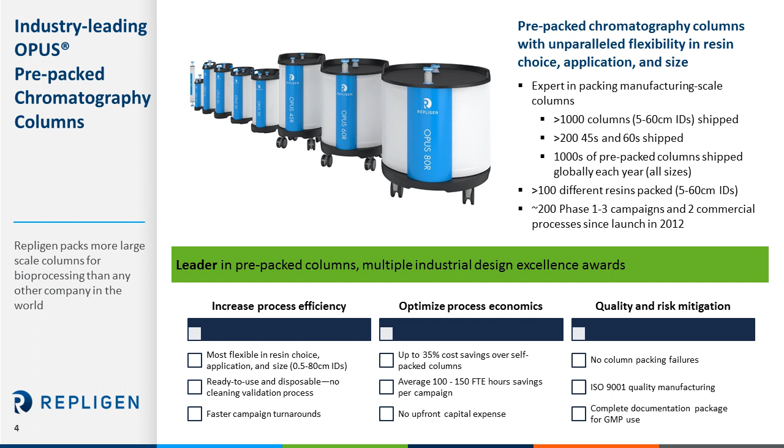Optimizing process economics, we are doing the packing steps for you. That means you save many hours of time in packing, in preparation for that packing, and all the documentation that goes along with that. Finally, from a quality and risk mitigation standpoint, we've built our quality system to support column use in the GMP environment. Today, our range of columns goes from 50 microliters now to 150 liters in column volume with the introduction of the Opus 80.

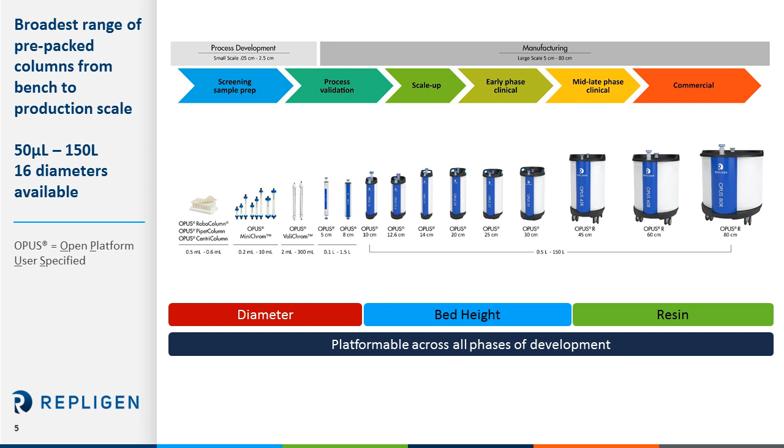As you can see on the slide, there are many different diameters in between. Our end users choose the diameter, a bed height which we can configure to the nearest millimeter, and then we pack any supplier's resin. This makes our columns very platformable across all phases of development.

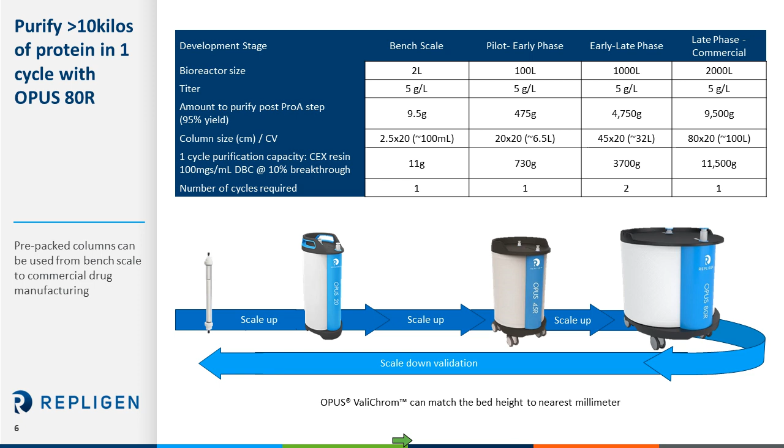You can see that with an 80 centimeter column, the purification horsepower is around 11,500 grams, which means you can purify, in this model, a harvest from a 2,000 liter bioreactor in one cycle. Or if you have multiple 2,000 liter reactors and are willing to run more than one cycle, the purification can also fit nicely with the 80 centimeter scale. This gives us additional flexibility and capability for processing large volumes of product through the 80 centimeter column.

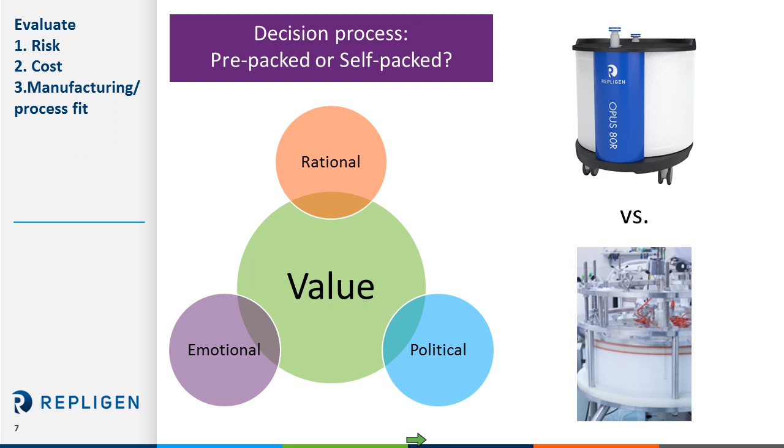This usually leads us to a discussion with our customers about pre-pack versus self-pack columns. The evaluation criteria are often risk, cost, manufacturing process, and fit. I don't have time to go into depth on all those factors in this presentation, but the summary is shown on the next slide. These are some of the things we've seen in the industry, and reasons why end users will end up buying pre-pack columns and move away from self-column packing.

There's economic savings that we can quantify, and we have a proprietary model that we use to help quantify the specific savings on a case-by-case basis.

Driving operational excellence and lean manufacturing principles, essentially making your process simpler by outsourcing the column packing step.

Eliminating packing-related risks. There's a lot of nuances that come with column packing, and if it's not an operation that you or your team does frequently, that can be a potential risk from a product timeline perspective, equipment, etc. So we take that risk away by doing the packing and the difficult work that comes along with it as part of our standard offering.

Flexible manufacturing strategies. These include things like multi-product or single-use facilities where changeover is often a time-consuming step, and pre-packed columns can help reduce that time. In addition, they offer a much smaller footprint versus conventional self-pack equipment.

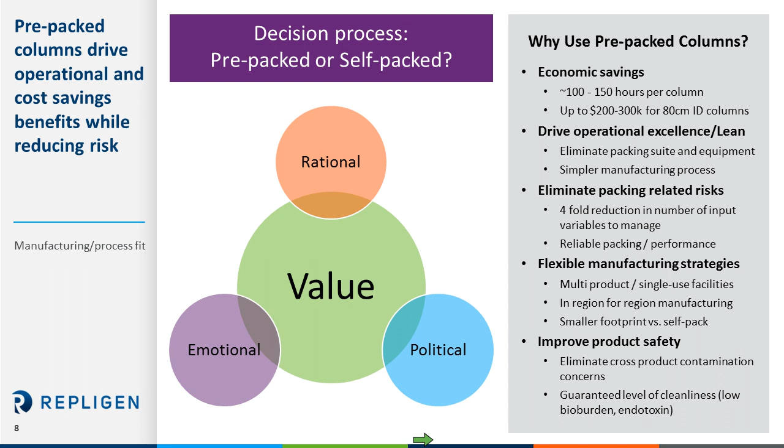So now that we've done an overview of self-packed versus pre-packed and understand a bit of the basics of the pre-packed column, we'll go on to show some Opus 80 centimeter applications data.

The column is 80 centimeter internal diameter. It can accommodate bed heights from 10 to 30 centimeters, and we pack resin from any supplier.

With the development of this column, we spent significant time optimizing the flow distribution system through computational fluid dynamics and experimental design. So I'll show a few slides on that.

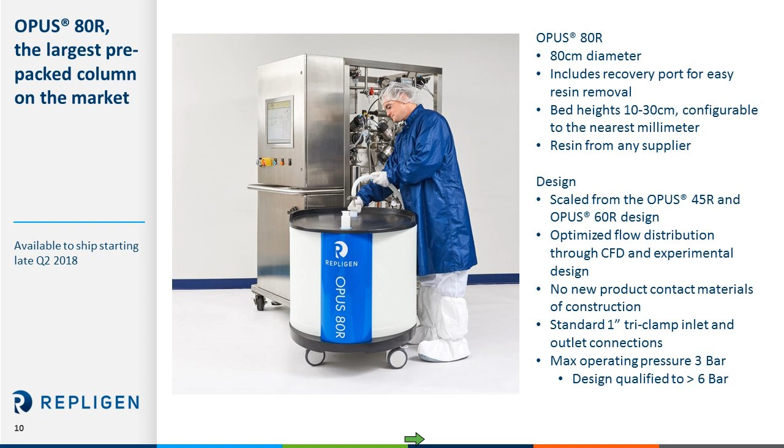In addition, there are no new product contact materials of construction compared to the 45 centimeter or 60 centimeter Opus designs. We use standard connections, and the maximum operating pressure is 3 bar. The design, of course, we've qualified to well above 6 bar, and this makes our columns fit into the normal bioprocessing workflows and conditions that you would typically run the columns.

The plastics are low leaching and Class 6 compliant, and that information is available, or more detailed information is available, in our regulatory support file.

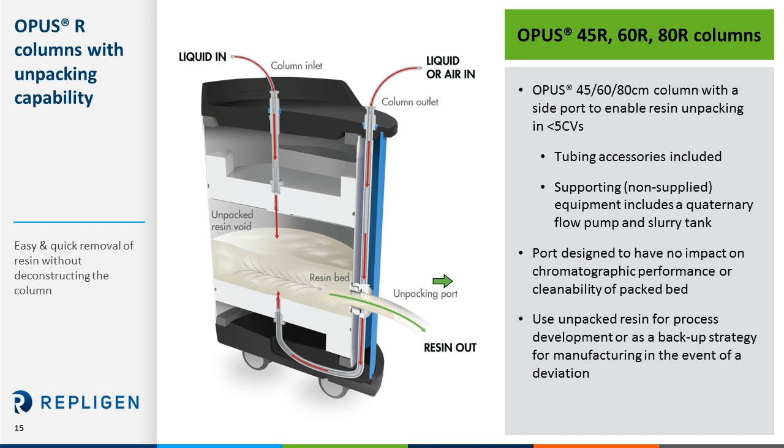So the recovery port, just to spend a few seconds on that, is designed to remove the resin from the chromatography column once it's packed, and that can be in the event of a deviation during production, or just if you want to get the resin out after use. So it's a convenient feature to have as a potential backup plan in production.

Back to column design of the flow distribution system. The 80 centimeter flow distributor has been engineered to design out holdup volume or reduce holdup volume, minimize back pressure, and minimize any non-uniformity of the support mesh. Each 80 centimeter Opus column has two flow distributors, one on the top, one on the bottom, as seen in the previous slide.

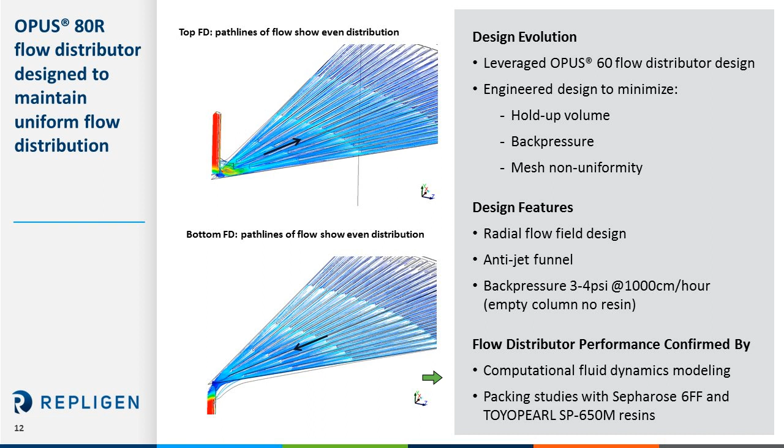This flow distribution system we've shown to be extremely efficient, both through the CFD modeling and some packing study data, which I'll show on the next slide.

Here what we're seeing is, on the left, a model with an agarose Sepharose 6 fast flow resin, looking at three different diameters, 80, 60, and 45. So these are all Opus columns. Asymmetry and then theoretical plate count measured in plates per meter. You see that the results of the different scales are very consistent. This shows the optimized flow distribution system in the 80 is not only efficient but scalable.

And then using a different resin, a model polymethacrylate resin, in this case Toyopearl SP650M. Different characteristics for this resin, so slightly different asymmetry and plate count results. Again, consistency from a 10 centimeter column, which is less than a 2 liter column volume, up to an 80 centimeter by 20 centimeter column with a 100 liter column volume. So there's a significant scale-up factor going from the 10 to the 80, and you see the results from plate count and asymmetry very consistent.

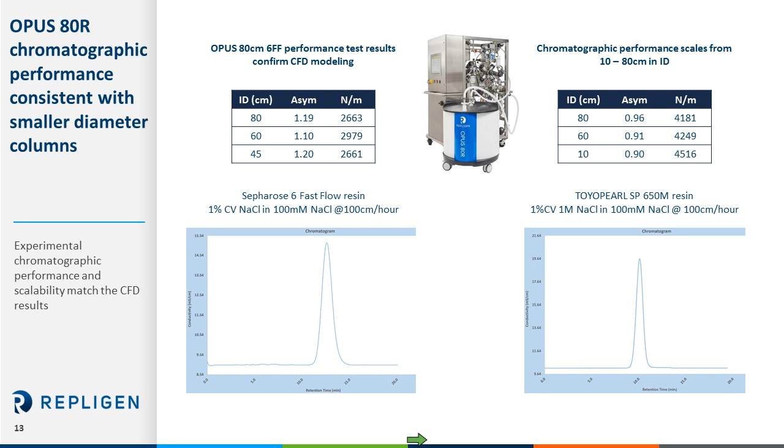And so lastly, on the applications data piece, no pre-pack column presentation would be complete without some shipping data. This is a test that we run for all of our columns when we introduce a new size. It's called an International Safe Transit Association test.

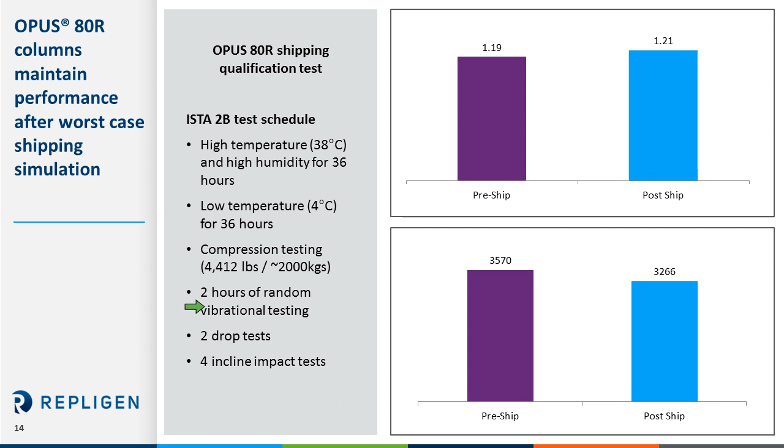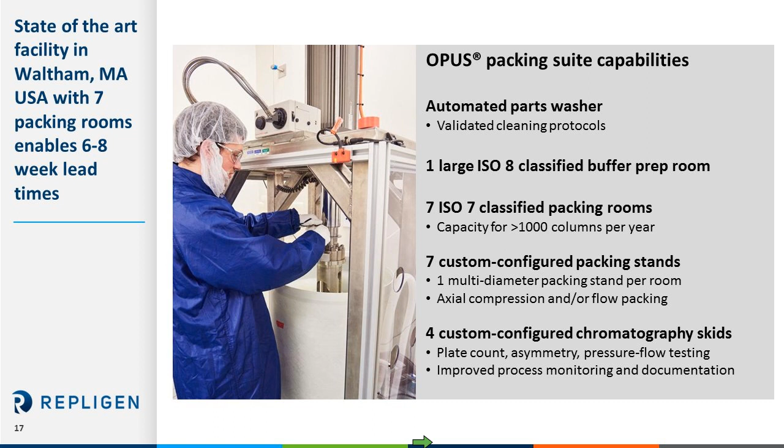Finally, to wrap up this presentation, our columns are packed in our facility in Waltham, Massachusetts, just outside of Boston. We have seven packing rooms with multi-diameter stands, meaning we can pack many different sizes in our customized packing stands. We have a large capacity for packing columns, which leads to a 6 to 8 week lead time as our standard, even for the 80 centimeter column.

To wrap up, Opus columns allow unparalleled flexibility, choosing from our variety of different diameters, resin from any supplier, and configuring bed heights to the nearest millimeter. This makes our columns very platformable, and combined with the value proposition for pre-packed columns—saving you a lot of time, a lot of money, making changeover easier—is a reason to, if you haven't already, look at pre-packed columns for your operations.

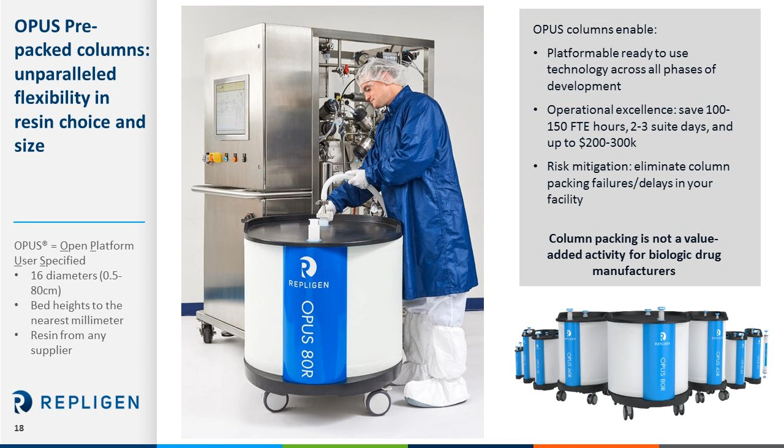Most importantly, leave on this last thought: column packing ultimately is a business that we've built here at Repligen, and your business is to make quality drug product. So we can focus on the column packing piece and allow you to focus on what's most important for your job. With that, I'll wrap up and take any questions.

The first question is, are these columns used for AAV downstream purification? Yes, we do have some columns used for AAV downstream purification, not at the 80 centimeter scale, but smaller scale columns, so yes.

And what is your packing limitation with respect to particle size? Another good question. The smallest particles that we can reliably pack are around 30 microns in diameter now. That depends on the exact resin type, but in general it's the 30 to 40 micron range that is the smallest particle size we can pack.

And how much does an 80 centimeter column weigh? So an 80 centimeter column will weigh—actually I have a convenient chart on that in a couple of slides—an 80 centimeter by 20 centimeter column will weigh approximately 315 kilograms.

And can the pre-packed columns be reused and stored? Right, so pre-packed columns—typically our end users are using our columns for campaign use, which often means they are used for a few cycles, then stored maybe for a few months or perhaps a year or two, then taken out of storage and qualified with plate count and asymmetry testing, and then reused again for that same molecule. So what we see typically, especially at our larger column sizes, is a cycle of use, storage, and then reuse.